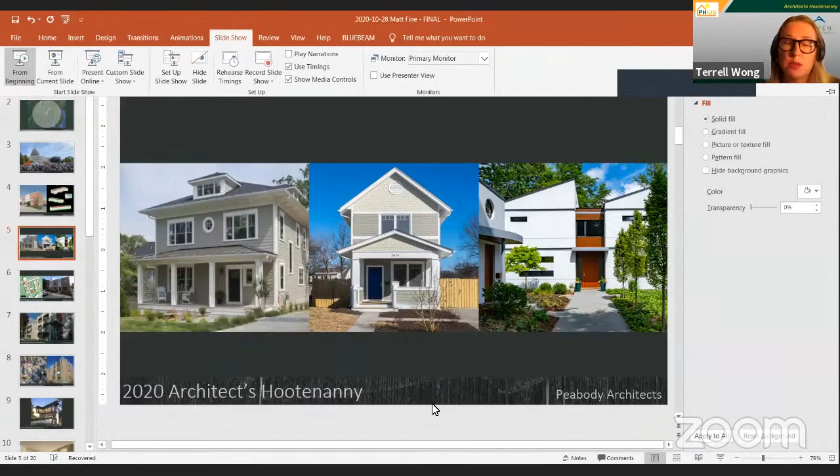So Matt has been following the passive house path actively for 13 years, focusing on multifamily residential and high performance homes. He works at Peabody Architects in Alexandria, Virginia. And if you Google the address, it's really quite a nice residential neighborhood. The project he feels most mixed emotions for, with its large challenges and innovations, was the retrofit of a 1967 masonry multi-unit residential building, the Weinberg Commons. When not toiling away thinking about supreme interior comfort with the integration of mechanicals and the envelope, you might find him at home riding a bike.

Under the category of damn, wish I had designed that, the symmetry and simplicity of Louis Kahn's Exeter Library was first on his list. His thoughts on 2020 and the pandemic: Matt is just so grateful to be able to continue safely at home while others are suiting up and on the front line. So let's give a warm welcome to Matt Fine and his talk on passive house architecture. Thank you.

Thank you, Terrell. Okay, the Pecha Kucha format is going to be a sprint for me, so I'm going to do my best here.

I come to high performance and passive house design through a lens of preservation. My youth was spent in the outdoors, a good portion of that. And I took away an appreciation for our resources, and I really wanted to, in my career, even though I would be making things, I wanted to preserve as much as possible.

The region is in the mixed humid climate of the mid-Atlantic. We practice in 125 miles of radius, but most of our projects are within the beltway of Washington, D.C. It's an area of polarities. It's an area of wealth and poverty, of unaffordability, and of a tough climate to work within with a mixed humid climate. Unfortunately, things change too slow around here. And so we're trying to make that scale jump and that velocity happen a little better.

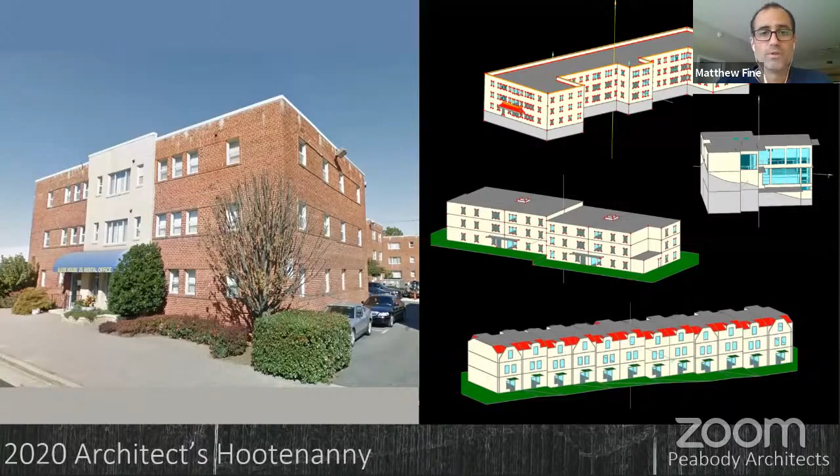We have a legacy of mid-century masonry buildings in the region that are inefficient to begin with, and pretty dense development. So the lots are scarce and usually difficult. We also have high-end construction, infill generally, but budgets are still difficult. So we still have to optimize the high-performance designs for these lots.

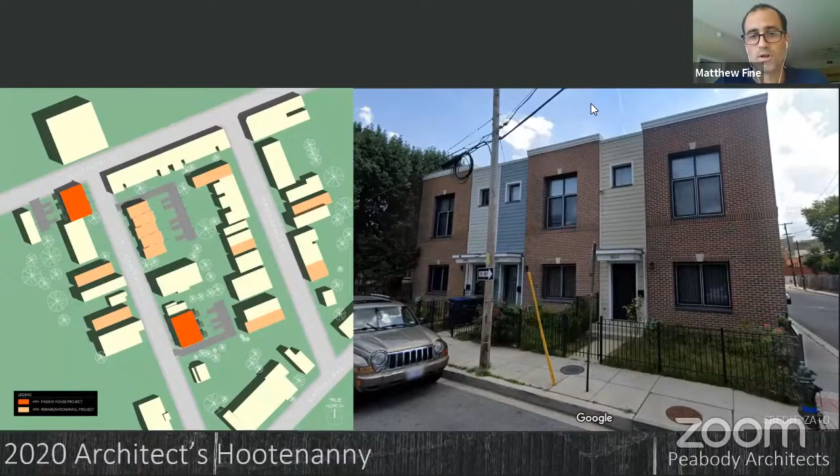In 2008, when the economic recession happened, I was fortunate to be in affordable housing at the time, and there was steady jobs still in this region. The pipeline for affordable work is slow. I began with DC Habitat for Humanity's Ivy City project, and the project that Terrell mentioned is the Weinberg Commons project, which was a masonry retrofit of '60s-era affordable buildings, 36 units in all.

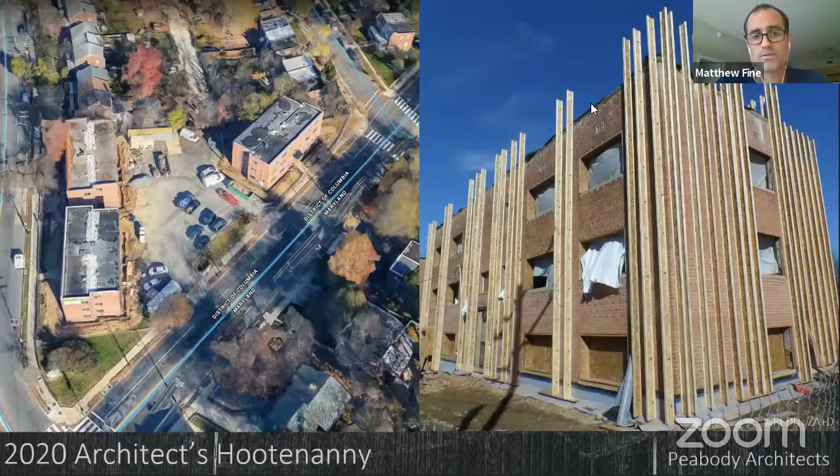And we really saw this as a scale jump from doing one-off single-family passive houses, and really kind of a demonstration project that we could show that we could use these old buildings, not disrupt community, not disrupt neighborhoods, but still deliver high performance. On the other end of the spectrum, in Peabody Architects, we're still working on high-end residential.

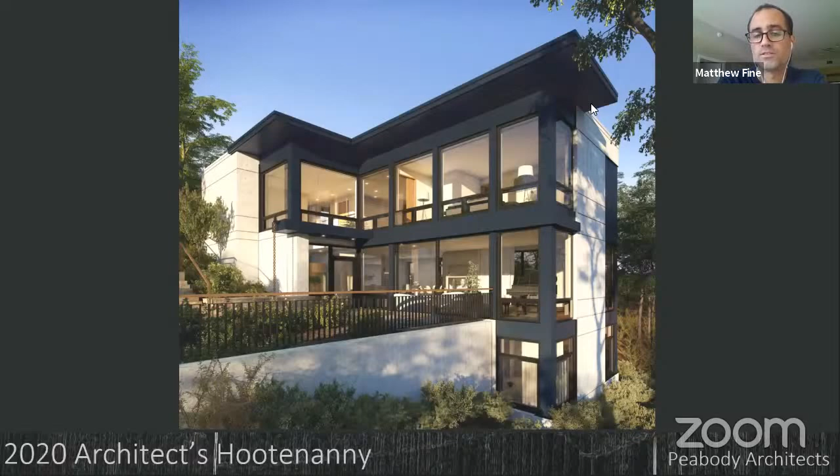And so this was kind of a playground, if you will, for us to take the lessons learned of those difficult projects and say, how can we refine this? How can we optimize interior comfort? How can we make a more delightful space? How can we bring the outdoors indoors more so, where we can control solar gains and really deliver as much supreme comfort as possible.

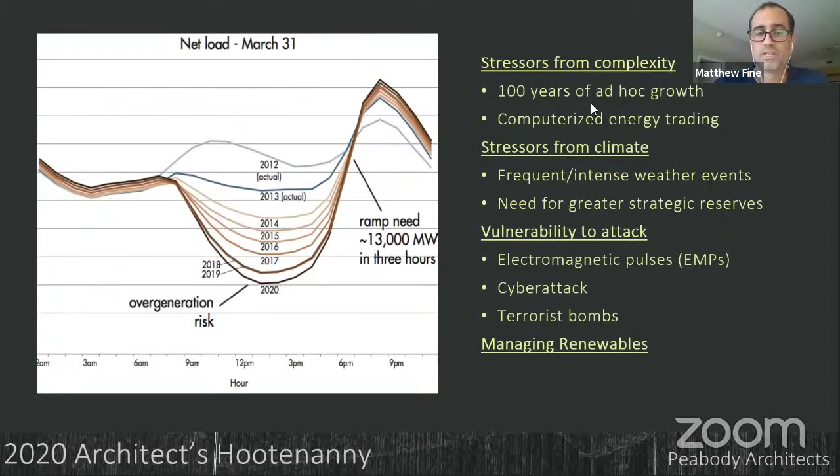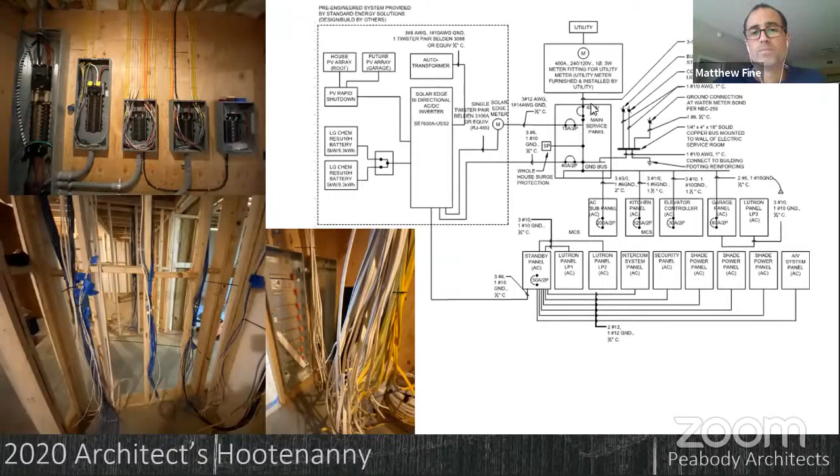This project in North Arlington is basically a future-ready house, and so the client was driven to collect solar energy and store it, because she wanted to be basically islandable, or be ready when the electric grid is ready to support our buildings. So the big takeaways from this is lots and lots of wire and special inverters, basically a bidirectional AC-DC inverter, which lets you collect and keep your DC electric locally and use that and not be grid tied.

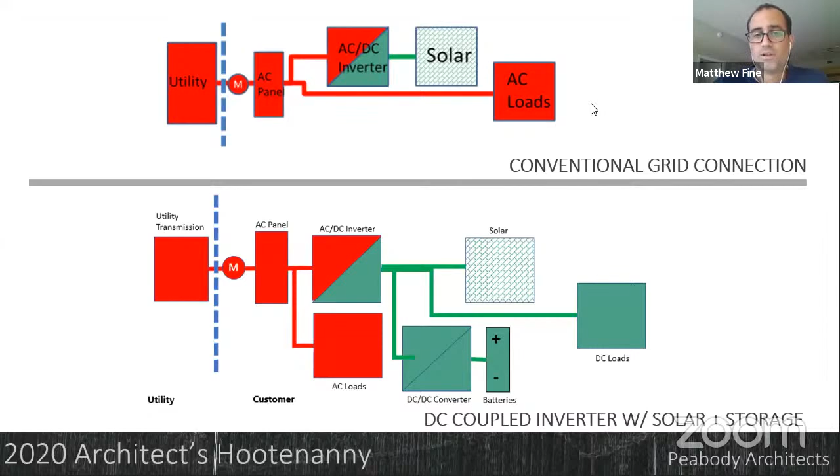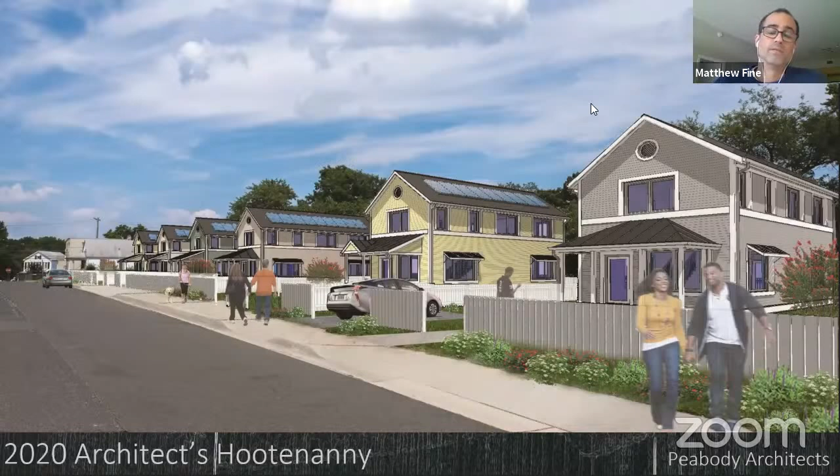The infrastructure is not ready for it. So this house, as I said, is future ready, is able to do that, but it's not able to feed, say, DC current to neighbors or to the neighborhood. Stepping back a bit, in the classification of cost, we really want to pay attention to that affordability problem that we have.

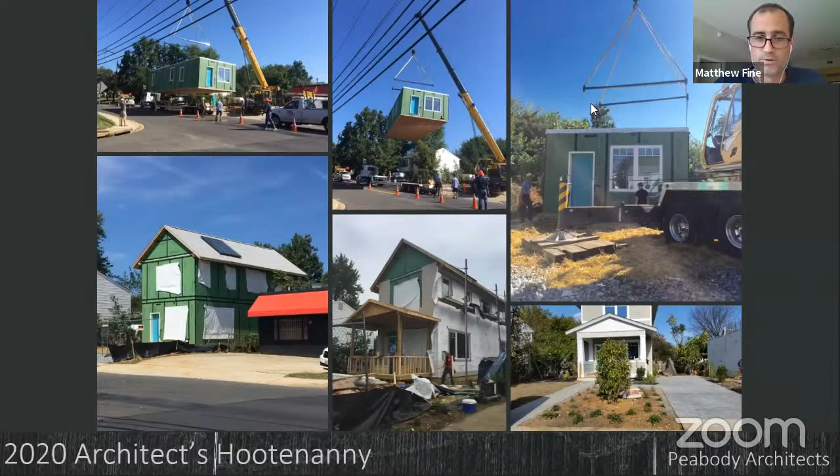Passive house, as we know, is not always equal to code construction cost-wise. So we really need to dial down the complexity of these buildings as far as envelopes. We need to standardize them. So modular construction is really a great way to do it affordably, we found. And, you know, economies of scale. So multiplication of the same design.

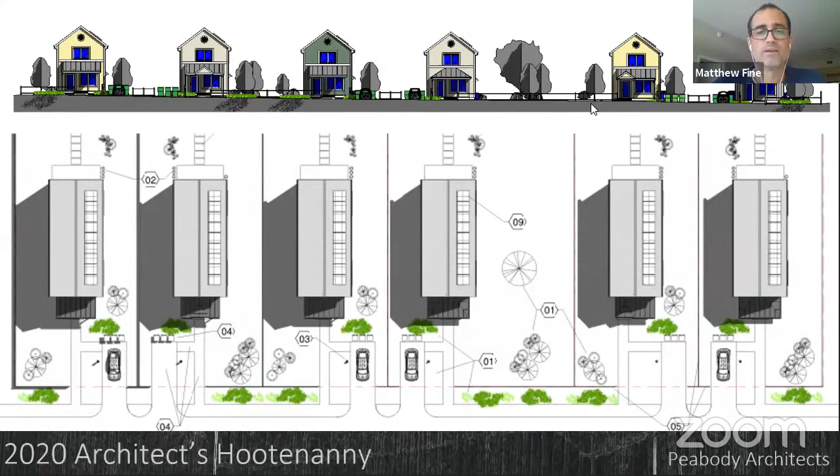Now, this is a project we have in Prince George's County in Maryland that is 6 affordable houses, 3-bedroom houses, which will be future ready by the use of a DC microgrid. In concept, it's the same as the single family DC ready house. It's to have inverters local, to collect and to be able to store local.

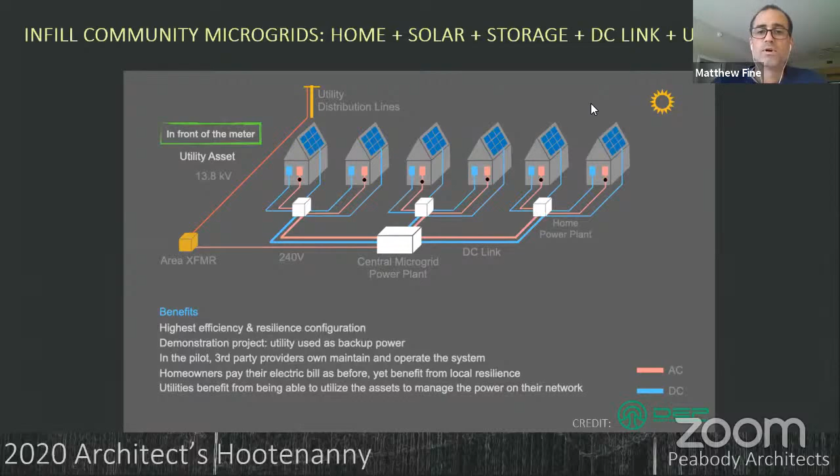So in concept, as I said, the grid, the infrastructure is not ready, but we can be as ready as possible for it. So it's basically just moving those inverters out of the houses and into the neighborhood, have these home power plants that share between a central power plant and the individual houses.

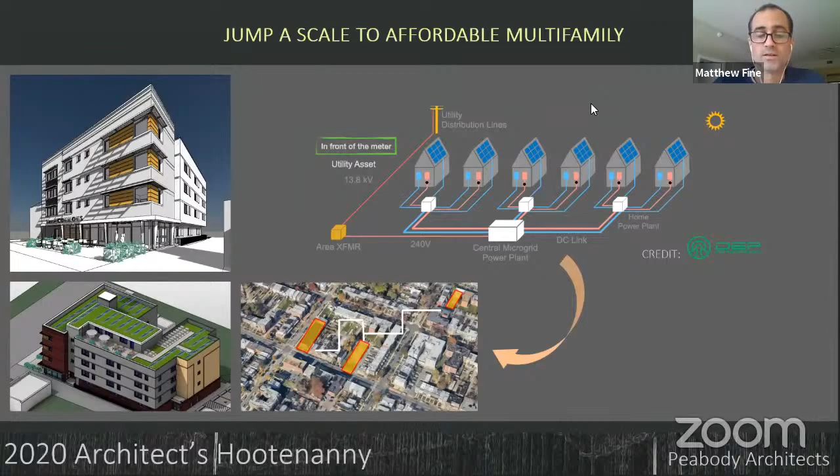Now, to look to the future, 6 houses is still a drop in the bucket. So we really need to pay attention to, again, jumping the scale and looking at more dense development, larger buildings, and really using the same technology. I return back to my roots and my values about this. I really think that we need to pay attention as architects to affordability and to equity. And I think the technology is there. I think as long as we're taking the helm as architects in these projects, we have hope.

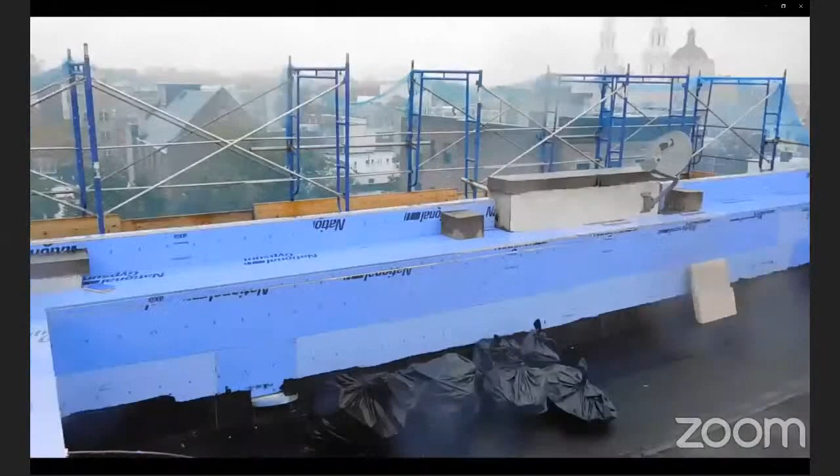Hello, Passive House friends. I'm here at 116 Grove Street in Brooklyn, and I'm going to show you the Casa Passiva project. This is a project to make existing buildings Passive House compliant with tenants in place. So we're up on the roof, and these are 4 buildings that happen to be in a row, and they're part of a 9 building project. And a lot of the work is happening up on the roof, and we're calling it our home base.

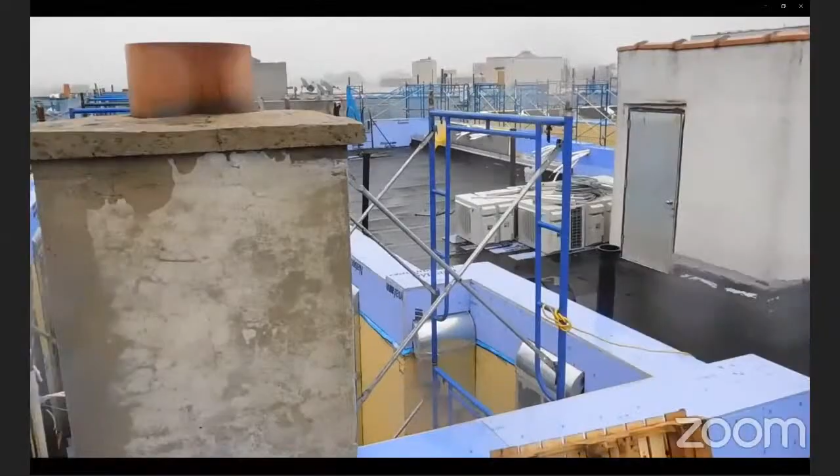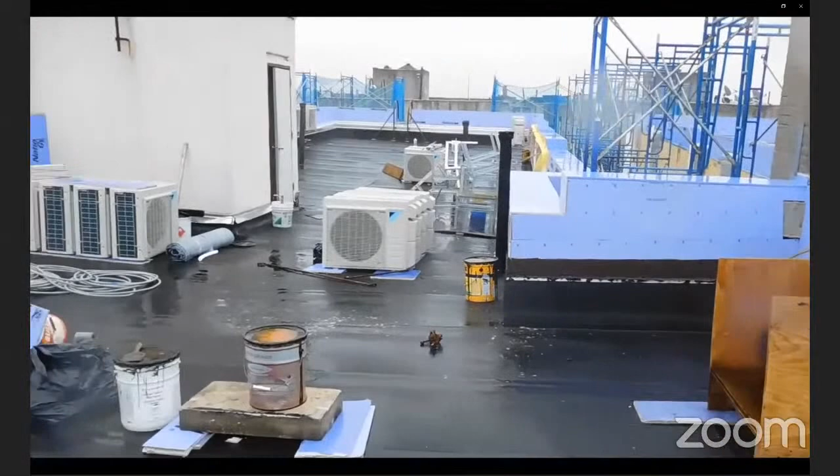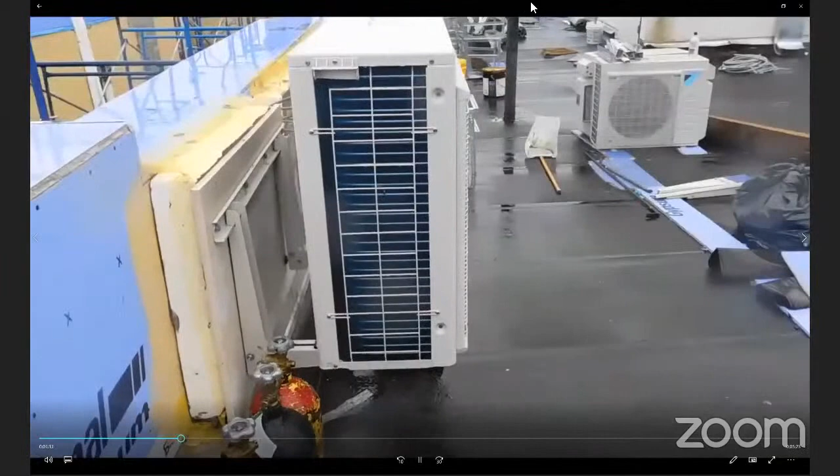So lots of details here, and we're going to walk through the roof and look at a bunch of the things that are going on here and talk about how they all come together. This view captures the basics of what we're doing here. We're mounting ductless split condenser units on the parapet walls. Here you can see a detail of that connection.

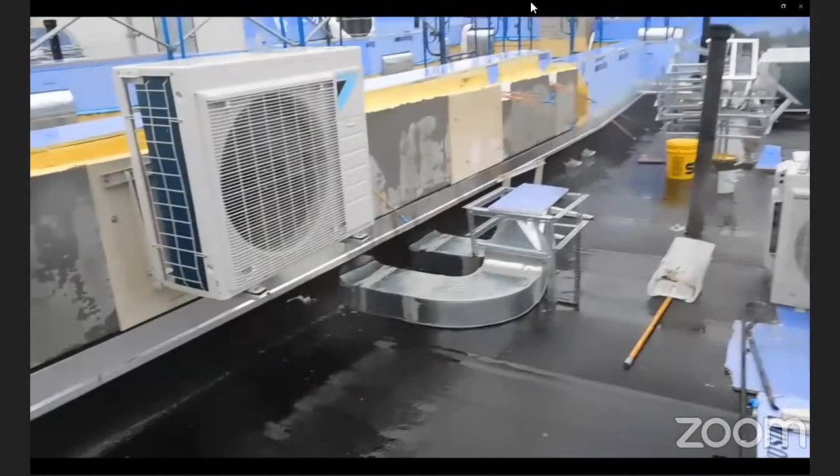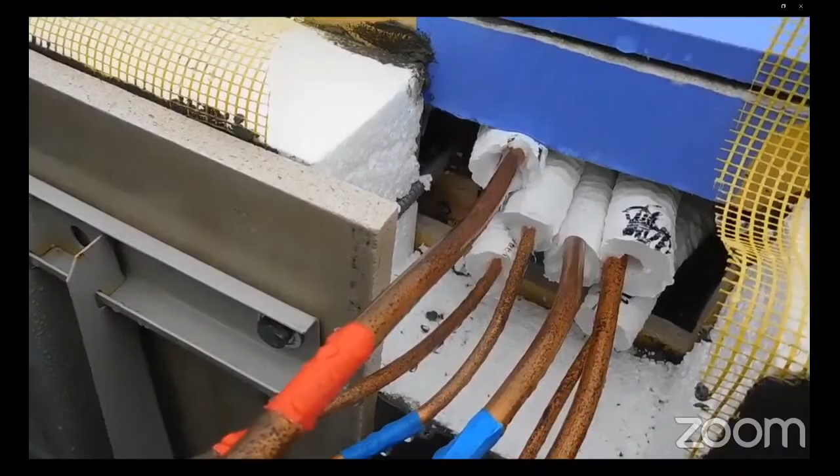Walking past the ductless split condensers, we come to a place where we will be mounting an energy recovery ventilator on top of this stand. And you can see the ductwork that is leading into it, and then insulated on the other side. The connection of the refrigerant lines from the outdoor unit to the indoor heads has a very strict protocol attached to it that we inspect.

And the first thing is brazing the refrigerant lines while running nitrogen through the refrigerant line. The second test for the refrigerant lines is to perform a pressurization test that will hold for 24 hours. And then after that test is passed, there's a triple evacuation to get moisture out of the lines.

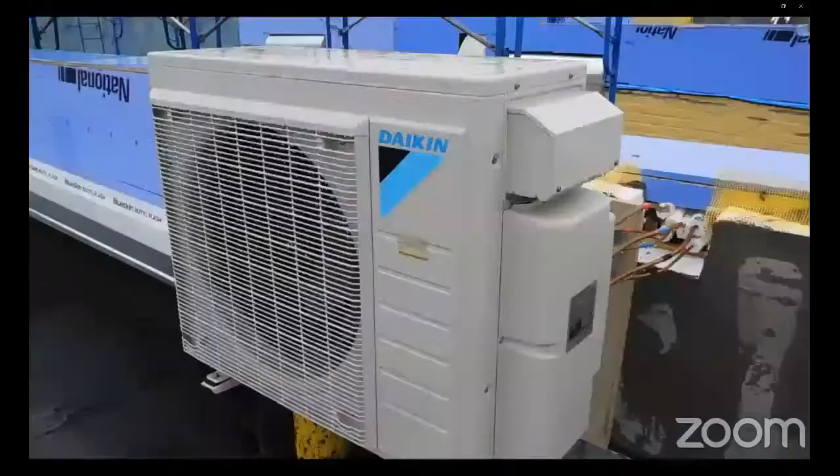And then finally, the amount of refrigerant is calculated, and if there is not enough refrigerant in the charge that came with the unit, there's additional refrigerant added, which is weighed out and monitored. This leaves our ductless split units with their optimal ability to perform.

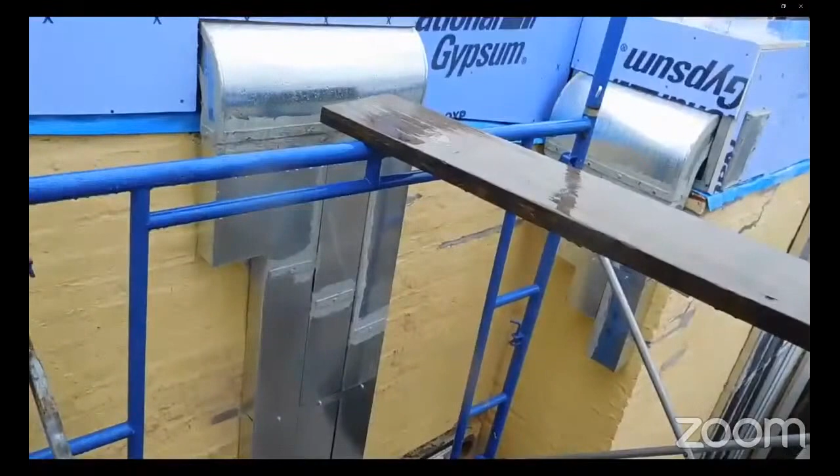In this view, you can see the ducts that have come out of the ERV up on the roof and are now coming through the parapet and waterfalling down the side of the building, with ports stopping at each of the apartments on the way down to provide either supply or return air.

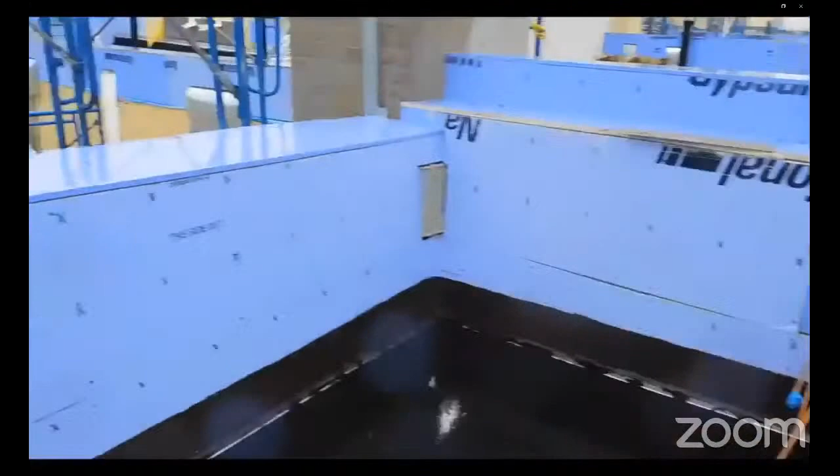Here you can see refrigerant lines that are coming through the parapets, and these lines are going to connect to the back side of the condensers, or the side of the condenser. And over here we see refrigerant lines going down that will connect to the interior.

Even though our parapet walls look a little crude, they get some special details, like this piece of metal flashing. This piece of metal flashing will be the end point for the EIFS that's coming over the top of the parapet wall. So this piece of flashing terminates the EIFS above, but at the same time allows for the roofing coming up to be removed sometime in the future when it needs to be replaced. A piece of foam will be installed behind this metal flashing with a metal apron holding it in place.

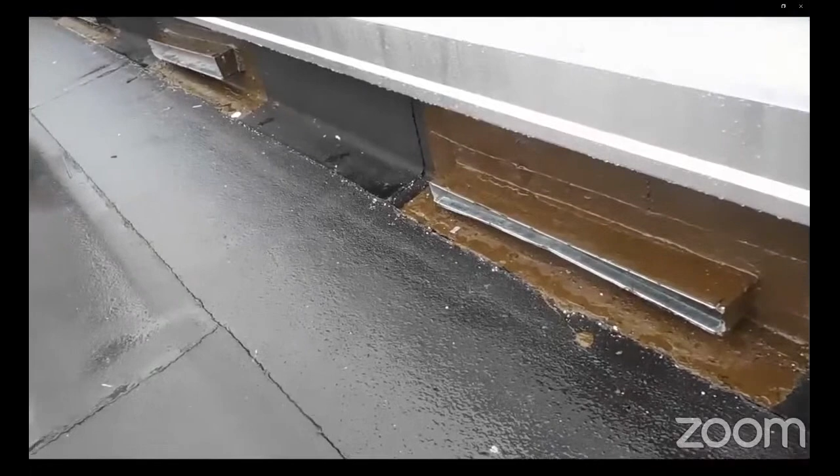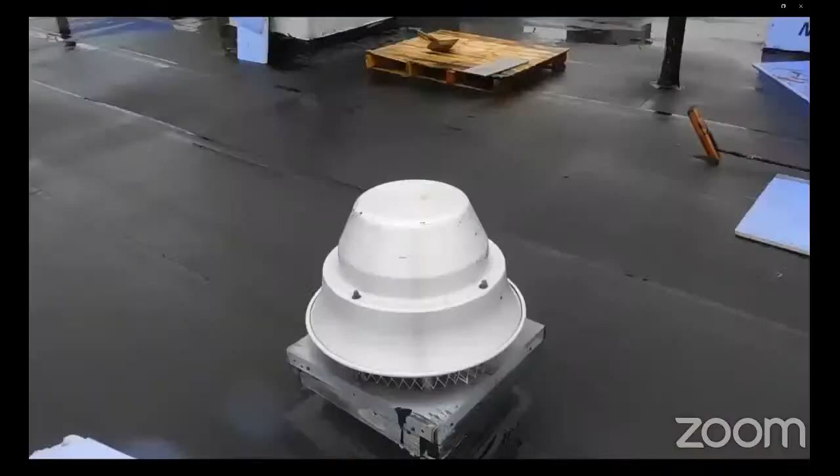Finally, all of the ducts that are leaving the roof from the ERVs are getting sealed into the roofing, and any ducts that come out on the roof side will get sealed into the roofing as well. So all the ducts are in the waterproofing. In places where we have an existing roof fan that already is there, we will use its ductwork, remove this fan, but place an ERV in this roof fan's position, clean the ducts, and seal them with AeroSeal.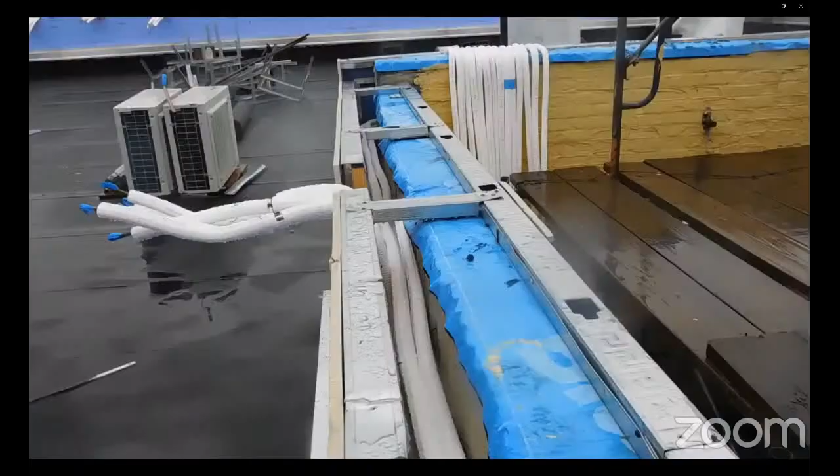Thank you, Chris. That was a very nice video. Now I get to introduce myself, which is very strange. So I started Stone's Throw Design because my passions in architecture, landscape, and ecology really didn't fit into the established firms in Toronto over 21 years ago.

Oh, I should share my screen now. I'm telling everybody else what to do, and I have forgotten what I'm supposed to do. Here we go. Sorry about that. And then from the beginning. Okay.

I've been running headfirst from one really cool project to another, not once wondering too hard about the consequences of my actions. Luckily, I've been blessed with clients almost as out there as I am, willing to try anything once. When I'm not sitting in my head saving the world, I hop on my electric Zero motorcycle and ride through the Ontario back roads. In the damn, I wish I designed that category.

There are too many to mention, but I will bring your attention to a small project at Bedford Glen Housing Project built around a ravine in Midtown Toronto. It has aged beautifully since its construction sometime in the mid to late 70s. Sadly, I've forgotten the architect's name.

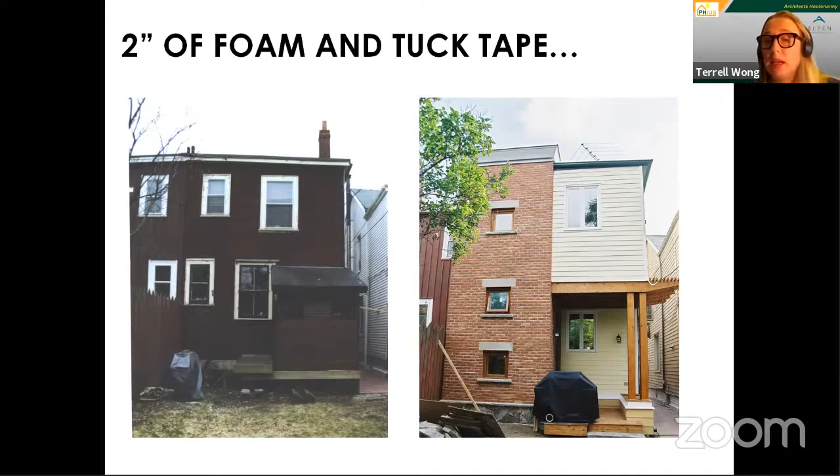At the beginning, I read everything I could get my hands on about construction, R2000, Joe Lstiburek, and the perfect wall. This is my first home, 5 different renovations, 5 types of insulation, many, many building experiments. Oh, I forgot the slide was still in there. Sorry, let's skip ahead. My first straw bale home.

A former classmate asked me to prepare working drawings for a cottage that she had designed. This was the first straw bale house in Muskoka. The township blew a gasket over the straw bale. They only agreed if Martin Liefhebber, a licensed architect with straw bale experience, signed off on the drawings. Luckily he did. Lots of lessons were learned.

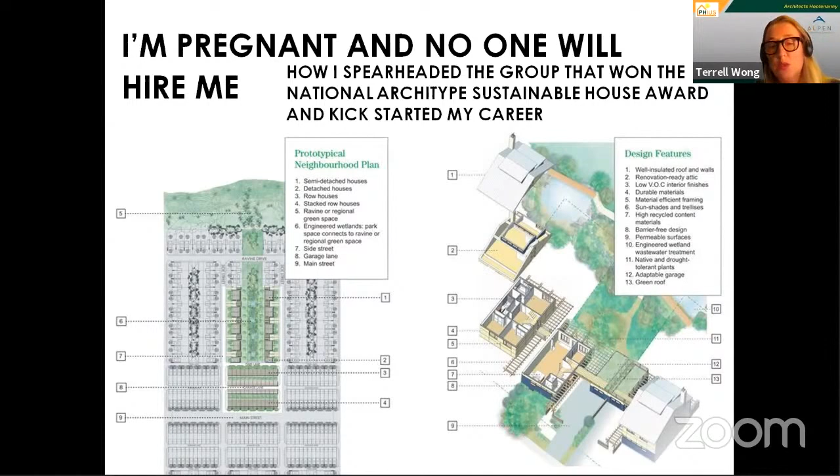This here is called building blocks. It was a prefab home with 10 out of 26 modules that you could choose to allow for a 2-bedroom to a 7-bedroom home. It could be combined to make a single family home, a semi-detached, a townhouse, or a stacked townhouse. In the center, if you can see my screen, there's a communal engineered wetland that deals with all the gray and black water on the site.

And then I found Passive House. Equipped with fresh Phius experience, training, and sheer enthusiasm, we gutted this house down to the structural masonry, built up new insulated walls, set them off 2 inches from the exterior for a continuous barrier. Sadly, the air tightness was only 1.5 air changes per hour, but it was my first attempt, and I had to use 80% existing windows. This house uses about 75% less energy than it did before.

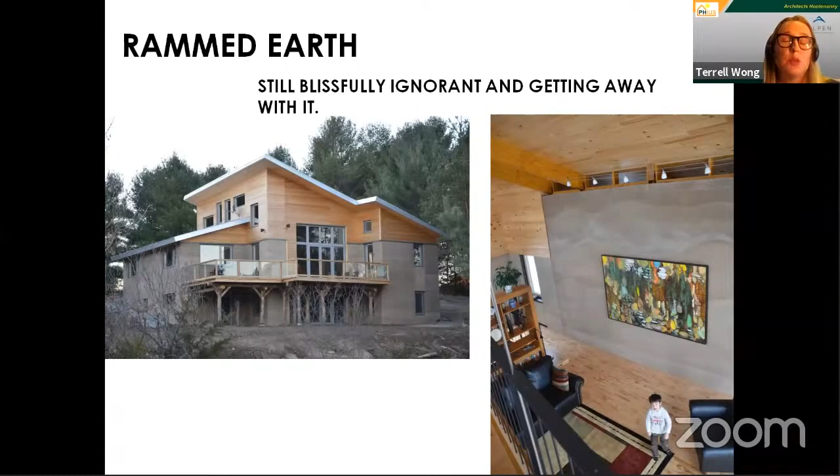And then someone asked me, would you design with dirt? Sure, that's my answer. 6 inches of rammed earth, 6 inches of polyiso insulation, and another 6 inches of rammed earth. The devil is in the details. We have a SIPs panel roof on this one, XPS under the slab, and the total site energy is well under the 120 kilowatt hours per square meter per annum.

Straw bale take 2. Permit is flat out denied without any explanations. So I changed the name of straw bale to cellulose and got a permit. Created a huge alternative compliance package on straw bale and made it public. Resubmitted, got the permit just before the straw arrived.

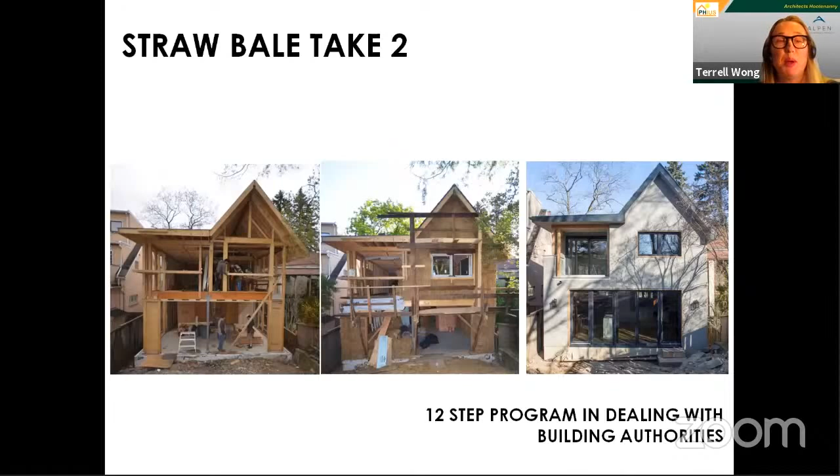Ooh, the picture didn't show up. Ooh, that's too bad.

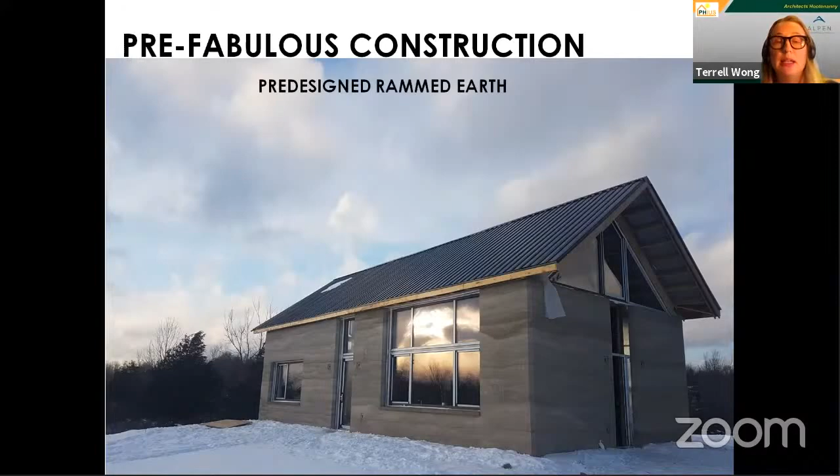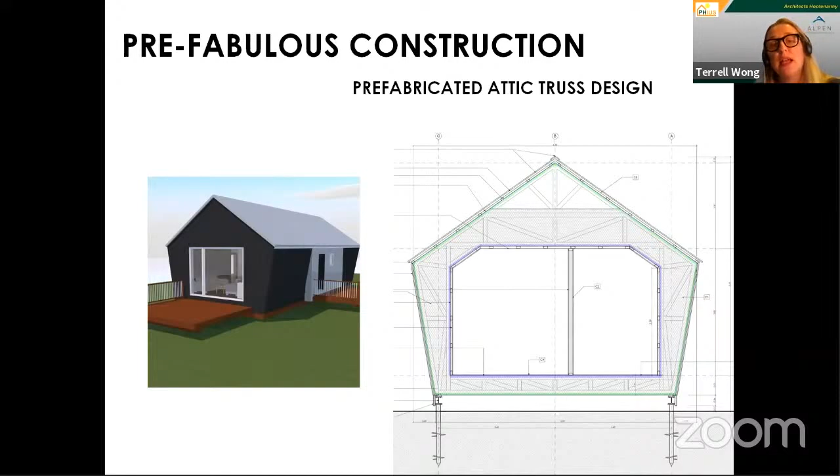There's another prefab design that I do, where we work with Aiken Frame Homes. We take attic trusses, put them on helical piles to create the house. This one is a 1-story home, but many of them are designed so that as the family grows, the attic truss is raised and the first floor is built afterwards. This is done with cellulose insulation and zip panels, sorry.

Oh, hopefully my pictures are going to show up. This is not good. I don't know what's happening. Okay, cross-country checkup. I had a map of Canada on there. I tested these earlier. This is very interesting. So this is where, this is so strange. This is where I was going to talk about Canada. I'm feeling very bad now.

Nova Scotia, I'm going to get a report from Laurie Rand at Habit Studio in Nova Scotia. So it's at the far east side of Canada. Nova Scotia has loads of single family homes, largely due to the work of Passive Design Solutions. Everyone knows Natalie Leonard. Her team is working on over 100 projects locally and in North America. Currently, Laurie Rand herself has 6 passive house projects on the go. And she's also working on a passive house museum in Cape Breton that is about to go to tender.

I have no idea why this is not working.

Okay. Quebec, that's in the middle, somewhere to the east of Ontario. Will Murray of Rocket Construction. There are a couple of Phius projects on the go in the Eastern Townships, and there is interest in certification, but with the very low cost of hydro in that province and the added cost of certification, the projects typically get pulled back to become really great houses, less the PV and the energy credits.

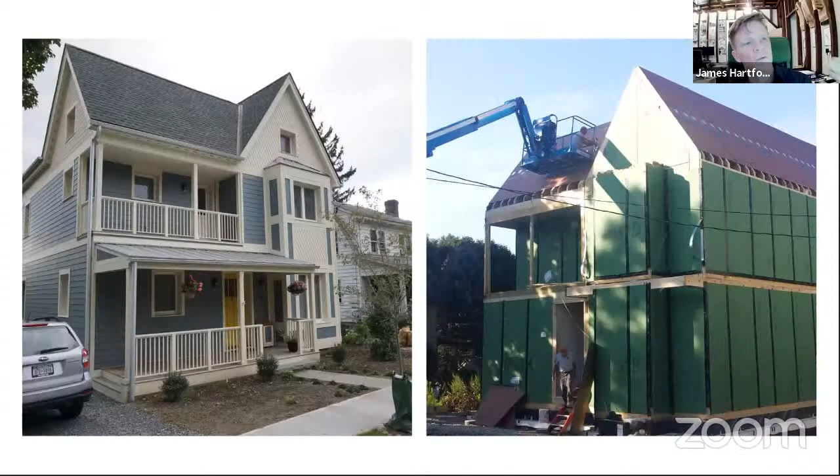So all the views are actually to the west and the north, and we actually only have one small window in the south. But glare is controlled by the mountains actually opposite. We had a loved Victorian house burned down, and we replaced it actually with a modular passive house, trying different ways. We essentially did a retrofit on this once the six boxes were set, and then brought it up.

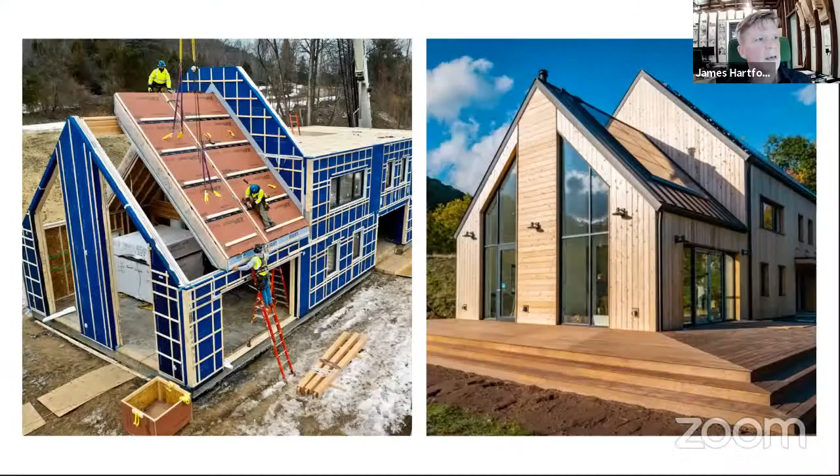So then we got into doing pre-design offerings, and our first client actually supersized our pre-design offerings that were meant to be much smaller. But we got to test the concept. And so this is in the Catskills. We built that with R.L. Baxter, a local passive house firm, and also used Benson Wood for our panels and flat packed it. And a Tesla Powerwall system, so we're fossil fuel free and get to flatten out our energy use throughout the day, and into the night.

Here's a house that's a bit more traditional looking. It's on a mountaintop here in Garrison, and it has views all the way down to New York City. It's got ICFs and Larsen truss construction, and also solar. It's source net zero. The interior is more classic. Back to Terrell's point, we want to make our buildings loved so that people don't change them much. So hopefully they have greater longevity that way. And rich materials, but honest materials that would wear well over time.

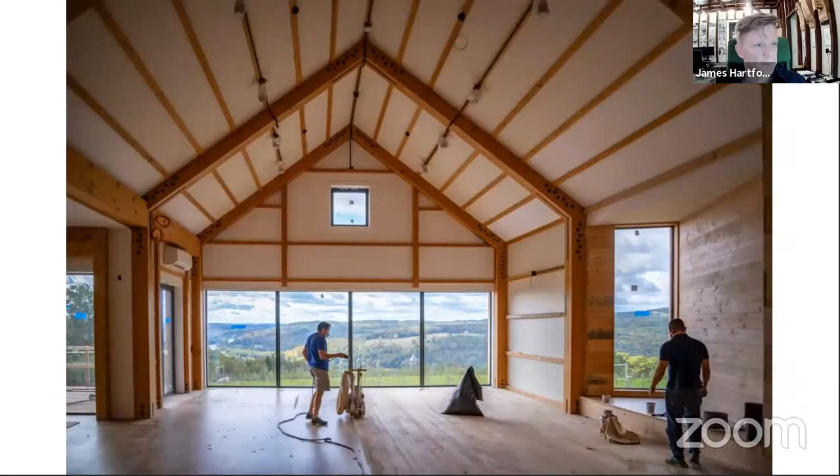We had a parallel business kind of in the works, developing breweries. And so we've done new construction, LEED Gold structures, as well as interior fit-outs of historic buildings. And it's a lot of fun because this is really getting back to bars and restaurants that a lot of architects cut their teeth on. And we got to actually bring both halves of our brain together, doing a passive house cidery and new construction, taking a modern take on the old bank barn approach, which is emblematic of the Catskills. So this project looks out over the Delaware River Valley, and across the orchards. We have one temperate zone downstairs in the production space, and then the event space itself is conditioned for human comfort, with reclaimed larch from a bridge project actually across the Hudson River.

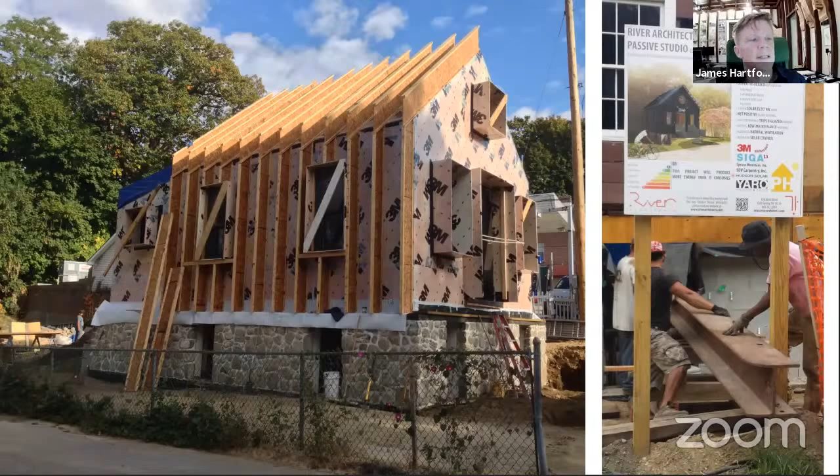And then our own studio, which is a circa 1840s barn, which was for shoeing horses. So we're source net zero, have 10 computers and dual monitors, and it's home to our studio and often to our kids, especially during the pandemic. This retrofit was quite a heavy lift. Literally, we moved the frame off the foundations, rebuilt the foundations, put the frame back on, and did an exterior tightening. You can see the cribbing being pulled out there underneath our project sign. We had extremely tight airtightness, 0.2 air changes per hour. But then we got to expose the interior timber and really enjoy the history from the inside. And it is often our training spot, but also our partying spot. Here we are with a three-generation building crew, the Hootenanny builders.

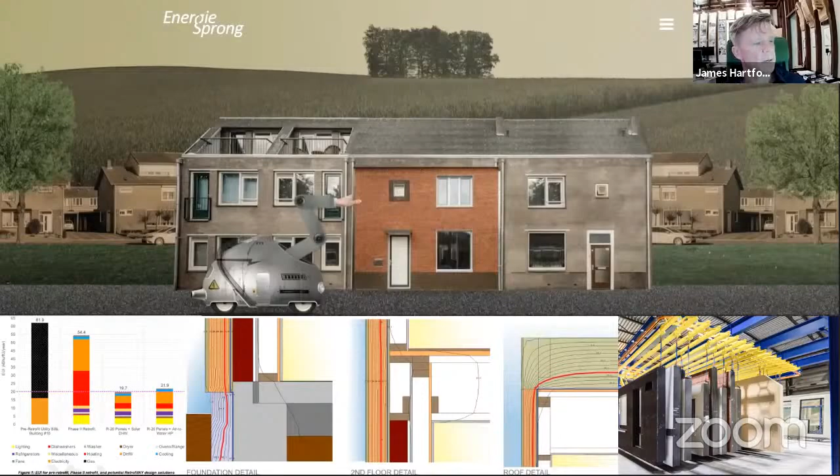Our firm also participated in the Energiesprong Retrofit New York pilot program. And we got to work on the Troy Housing Authority conceptually, bringing the EUI down from 81 in the original buildings to below around 16. And then we also participated in the NYSERDA Buildings of Excellence first program and won $1 million for our clients for this project, a 53 new dwelling unit over commercial space. Obviously very interested in reducing local impact. And I'm the founder of the Passive House Alliance Hudson Valley, which is the largest passive chapter in the Northeast. Very busy in advocacy and working very closely with NYSERDA, bringing Phius training to the Hudson Valley and connecting professionals. And that's my time. Thanks.

All right, had to unmute myself there. Okay, thank you very much, James. That was great. At least your slide showed. I'm feeling very bad. All right, so we're going to move on to Catherine Baker of Landon Bone Baker Architects. Catherine, can you show your screen now so nobody has to look at me?

Catherine is of many minds, with a master's in social science, a degree in architecture, and she's a passive house expert. She has combined her passions into creating livable, low-energy, multi-unit residential buildings. She's passionate about how different cultures and different individuals affect the buildings they live in, how the users personalize construction over time. Her favorite project is the Dorchester Art and Housing Collaborative Project. They took an abandoned building and turned it into artist housing with a community art space. Programming is available constantly for the immediate neighborhood, and the building has become well loved by the community. In the category she wishes she had designed, Notre Dame du Haut chapel by Le Corbusier at Ronchamp is her favorite.

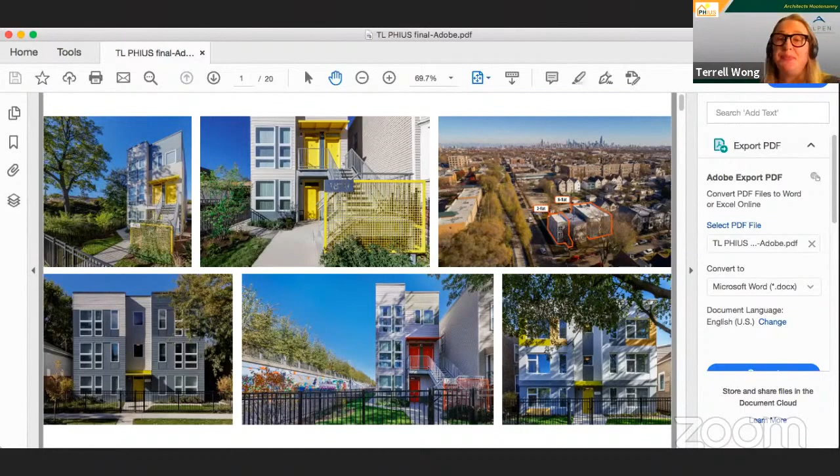Thank you, Terrell. I'll talk a little bit about Tierra Linda. So Tierra Linda is an affordable housing project that contains the first multifamily passive house residence constructed in Chicago, Illinois. And that's kind of important because Chicago has an issue with fire, so our building code's a little bit complicated.

It was developed by the Community Development Corporation, LUCHA, also known as Latin United Community Housing Association. So I am Catherine Baker, and I'm an architect who works at Landon Bone Baker Architects. We design affordable housing, mainly in Chicago, and I'm going to tell you a little bit, about 6.5 minutes worth, about passive house at Tierra Linda and why we believe it's important. Some background on the project.

Tierra Linda was originally conceived of as an affordable housing project, providing 45 affordable family apartments in the Humboldt Park and Logan Square neighborhoods in Chicago. Affordable housing is critical in these neighborhoods. In Humboldt Park, approximately 65% of the rental population is cost burdened, meaning 65% of residents pay over 30% of their income on rent. The Logan Square neighborhood has also been identified as having a lack of parks and green space. In fact, it had the least amount of green space per capita in the city of Chicago.

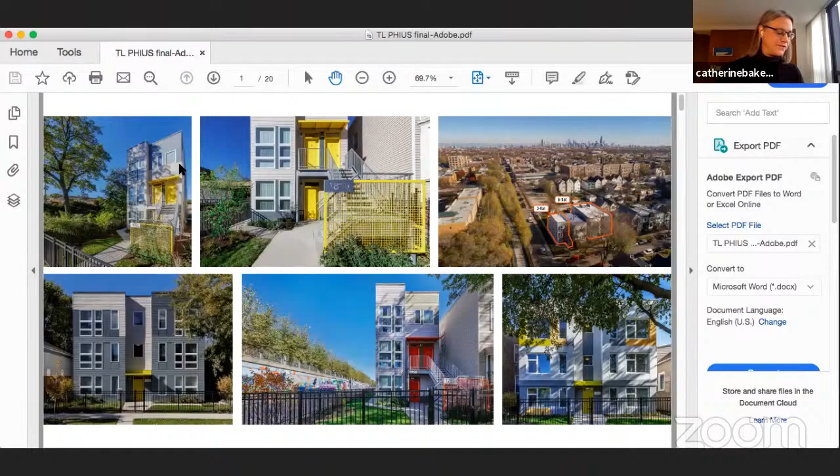In 2015, a plan by the city to transform an abandoned elevated rail line called the 606 into a 2.7 mile pedestrian trail was realized. The new trail brought much needed...

Yep. Your slides are not advancing. Oh, okay, sorry. Let's see. Do you know where I left off? It was the big screen from the beginning, the same one. Oh dear, okay. Just start over, do it again. All right, let's see, maybe it'll load. Okay.

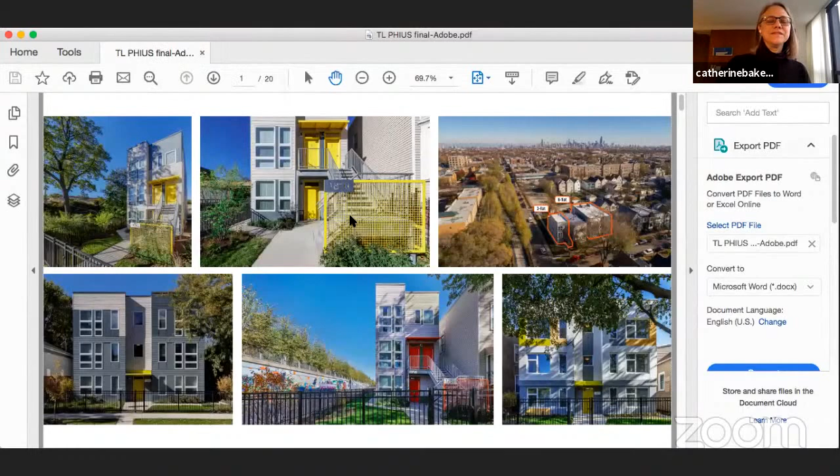Okay, so Tierra Linda is an affordable housing project that contains the first multifamily passive house residence constructed in Chicago, Illinois. It was developed by the Community Development Corporation, LUCHA, Latin United Community Housing Association, in 2018.

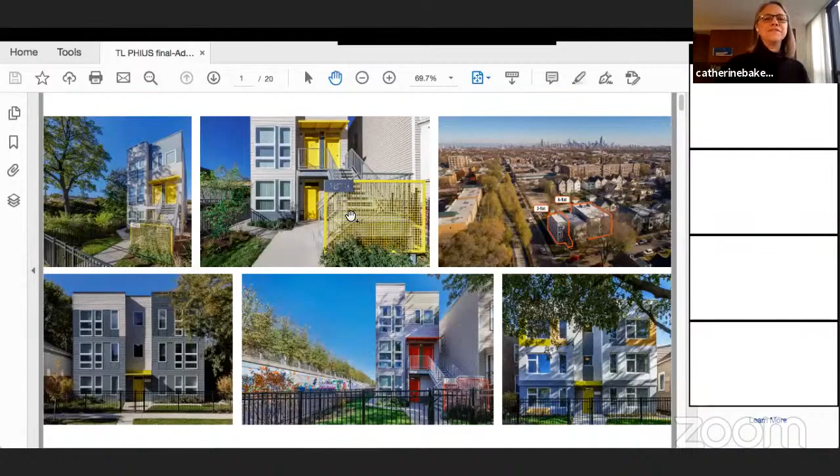So let's see if they advance before I continue on. Are you seeing the slide? It's still the first picture that we saw initially. Okay. I'll just have to advance. Okay, sorry, we're just going to do it low key here.

Fine. So my name is Catherine Baker, and I'm an architect who works at Landon Bone Baker Architects. We design affordable housing, mainly in Chicago, and I'm going to tell you a little bit about the project, about 6.5 minutes worth, maybe a little bit more now, about Passive House at Tierra Linda and why we believe it's important. Some background on the project.

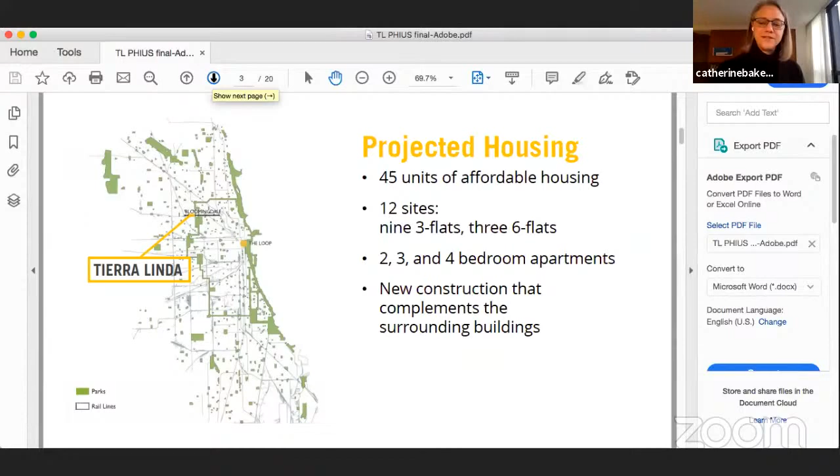Tierra Linda was originally conceived of as an affordable housing project, providing 45 affordable family apartments in the Humboldt Park and Logan Square neighborhoods in Chicago. Affordable housing is critical in these neighborhoods. In Humboldt Park, approximately 65% of the rental population is cost burdened, meaning 65% of residents pay over 30% of their income on rent. Logan Square neighborhood has also been identified as having a lack of parks and green space. In fact, it had the least amount of green space per capita in the city of Chicago.

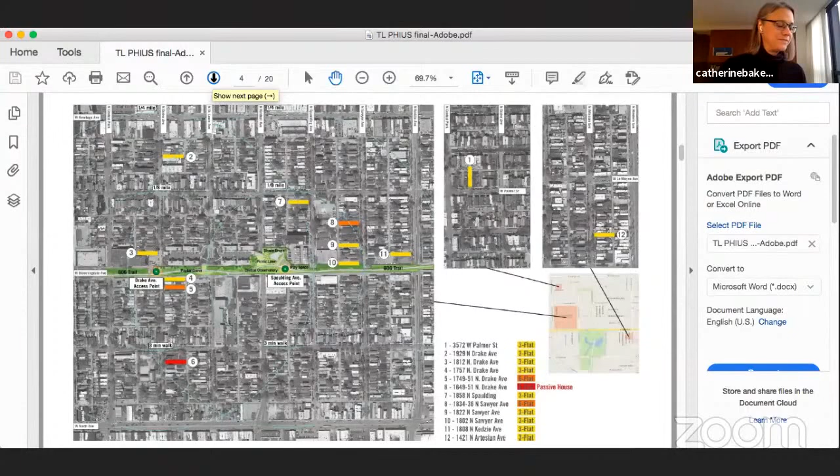In 2015, a plan by the city to transform an abandoned elevated rail line called the 606 into a 2.7 mile pedestrian trail was realized. The new trail brought much needed green space to the neighborhood, but it also spurred real estate speculation and gentrification, which threatens affordable housing. A lack of decent affordable housing compounded with a lack of green spaces in these neighborhoods have been prime contributing factors to health issues such as asthma, diabetes, and obesity. Many residents forego medical care, surgery, treatment, prescriptions, and even eyeglasses due to cost.

As the project was forming, LUCHA understood that providing affordable housing wasn't going to be enough. The housing needed to address overall quality of life issues for the residents. And to be successful, it needed to address these issues through a collaborative process driven by community needs and input. LUCHA believed that the residents deserved the most sustainable housing possible and wanted to pursue passive house design.

Being the first multifamily passive house project was important, but just as important was the process taken to achieve this milestone and the implications of this development on future affordable housing projects. LBBA and LUCHA developed and hosted workshops, neighborhood tours, and eco-charrettes with building management, tenants, neighbors, and maintenance staff.

Based on the input from the workshops, the strategies and vision for the project were formed, reinforcing and supporting the core theme of healthy living and wellness. The engagement process also resulted in the design of vibrant buildings that serve as a visual reminder that Latinx families are part of the history and the future of the Chicago neighborhood. Residents helped to select the finishes and colors of the buildings.

As a way to further address healthy living initiatives, Lucha asked LBBA to engage its LBBA Labs program to research and promote bike use with its residents. During a 6-week paid high school internship program, Chicago high school students interviewed Lucha residents about their bike use. They researched the neighborhood, visited bike shops, toured buildings with bike-centered design, and ultimately created an overall plan for integrating bike use into the Lucha buildings.

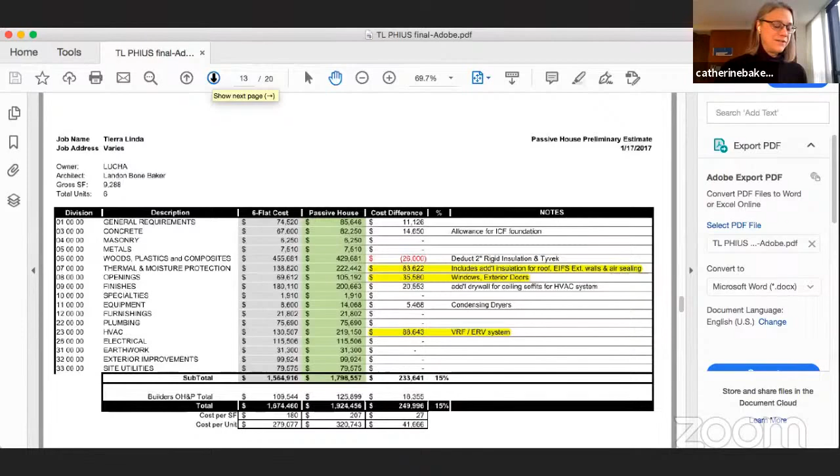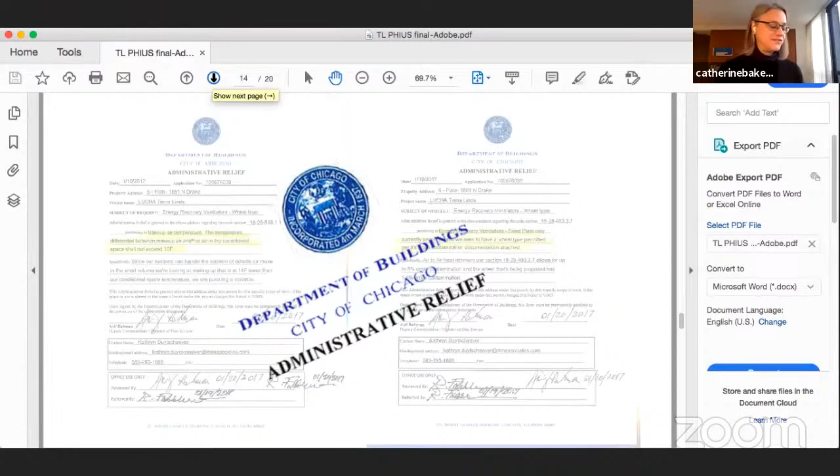Our team and Linn-Mathes, the contractor, researched various wall configurations to meet building codes, energy modeling requirements, construction sequencing, and all with respect to cost issues. Building a multifamily passive house also required code modifications. The team needed to seek administrative relief for non-conforming building code items, such as the wheel-type ERV, and approval for reduced mechanical ventilation. The project received its first residents in the fall of 2018.

One of the very first residents, in fact, had been displaced earlier by Hurricane Maria in Puerto Rico, and she was now experiencing the brutal polar vortex of early 2019. But this time around, her housing was designed to address climate extremes. So what are we doing now? What have we learned? We are currently gathering data.

In addition to the Passive House 6-flat, the development also includes a sister building designed to comply with code minimum Energy Star requirements. These two buildings will allow our partner, Slipstream, to compare energy usage between the two. Slipstream will be analyzing energy performance, construction operating cost, and indoor air quality. In August, Slipstream provided us with some preliminary data. Some key interim takeaways included expected results.

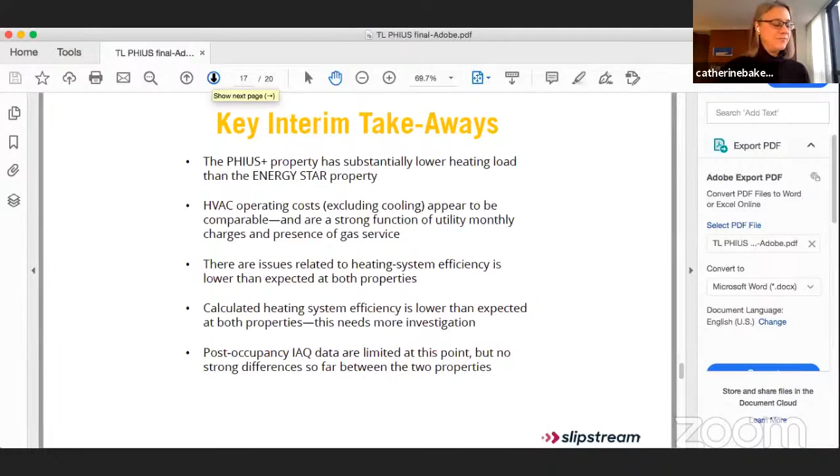The Phius property's air leakage is about 1/3 of the Energy Star property, and the seasonal heating requirement for the Phius property was half of the Energy Star property. But we also learned that data vary greatly between the individual units based on occupancy and behavior. Slipstream's yearly report is coming out soon. Stay tuned. The final report comes out on November 7th. We expect to have more data on cooling loads and a cost analysis. And then there are additional issues that have yet to be identified and will be explored further.

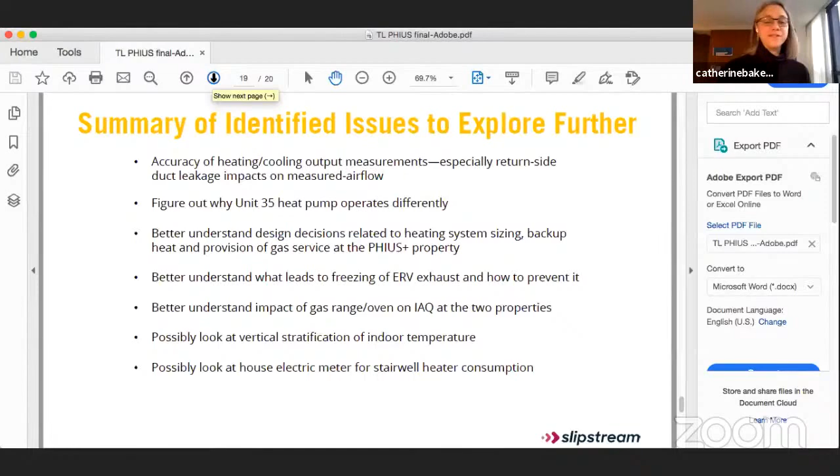So we hope that the success of Tierra Linda opens the door for other affordable housing and also for-profit developers to incorporate passive house standards. We look forward to sharing our lessons with others to promote sustainable and healthy living environments.

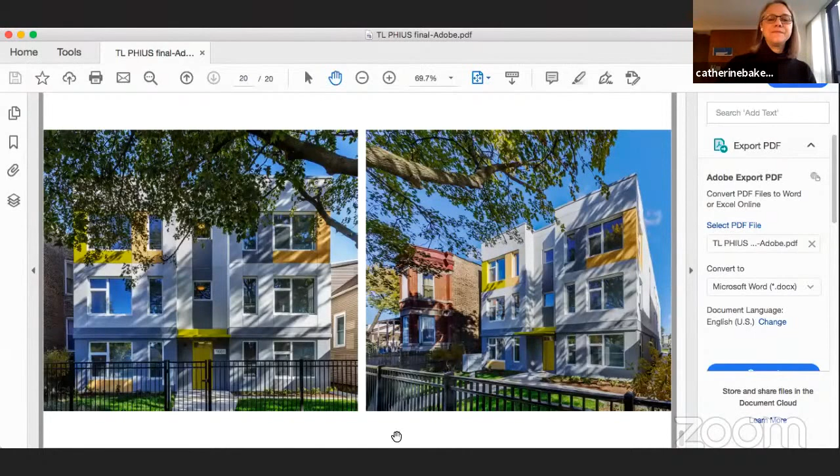Andrew has been putting his architect brain to work ensuring university students get firsthand experience living in passive house comfort. He is proud of the 2 Phius certified dormitories at Williams and Wheaton College. He worked both on the design and on the site construction admin. Andrew's passions turned him on to passive house, taking the training on his own initiative. Keeping up with the passive house community at conferences and in local chapters is important to him.

Finally, someone else to talk to. Currently, he is reading Being Ecological by Timothy Morton, any book that mixes references to Blade Runner, Tibetan Buddhism, and the lyrics of the Talking Heads. I might have to get that. This might also explain Andrew's choice for "damn, I wish I designed that": the Foundling Hospital in Florence by Brunelleschi. This is a man of very diverse thinking. When he is not working, his focus is on his 2 young children. I am certain they will get fantastic answers to the question of why.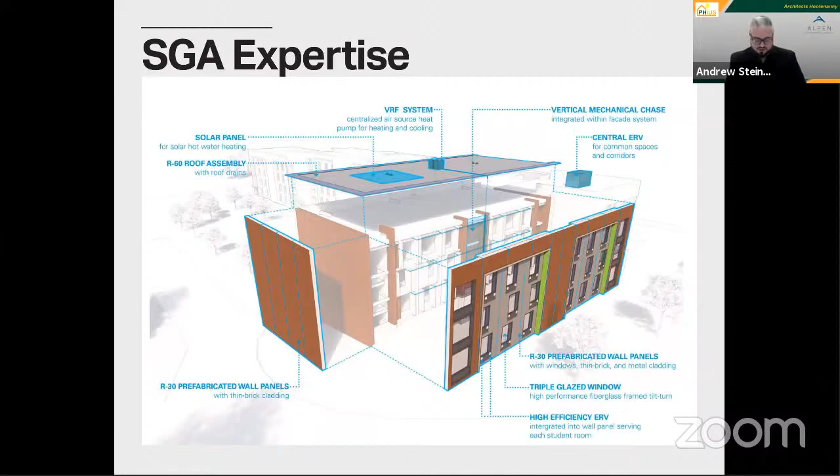As I was saying, our passive building activity has really been championed by our higher ed group here at SGA. And residential halls are a good fit for passive house. Academic institutions see the benefit of the long-term payback through the energy savings and cost savings. And increasingly, students expect to live in sustainable environments.

My personal journey began out of school with working on large commercial buildings, core and shell, multifamily, and renovations on existing buildings like this one. There was a high level of design involved, but the projects weren't particularly energy focused and often involved a lot of glass, although very nicely designed glass. Through these projects, I gained exposure to construction types used in large commercial buildings.

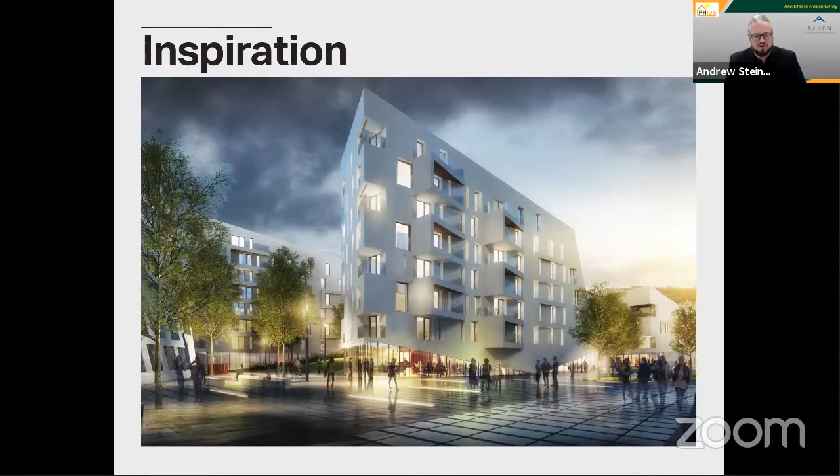Around that time, I started seeing these images on ArchDaily and other places of these really interesting buildings in Europe that were well designed and also didn't use much energy. And I started to say, wow, buildings can do that. And additionally, I became aware of more local examples in our Boston design community of some really great work happening.

My personal journey continued with these Habitat for Humanity projects. They were the first projects of my own which allowed me to experiment. These were the most efficient buildings that this chapter had built to date. They're using HERS scores. I think they're down in the low 30s. In 2013, I took the Phius training and recognized that we have the roadmap to high performance buildings. The second one on the right actually had all the components of a passive house. Zehnder was kind enough to donate ERVs for the project, slightly less R value per Habitat standards.

My evolution continued as a practicing architect. I continued to try to be as responsible as possible with my work. This lab office building in Baltimore had a 40% window wall ratio and better detailing informed by my passive house training, including the beginnings of a window surround detail here that provided shading as well. So I continued to try to be as responsible as possible with my work.

And when I joined SGA, we had our res hall at Williams College underway. This is the first passive house building in our office. And I worked on the detailing and in-house passive house consulting. And it shows how a passive house building can take the form of a wood frame vernacular New England residential building.

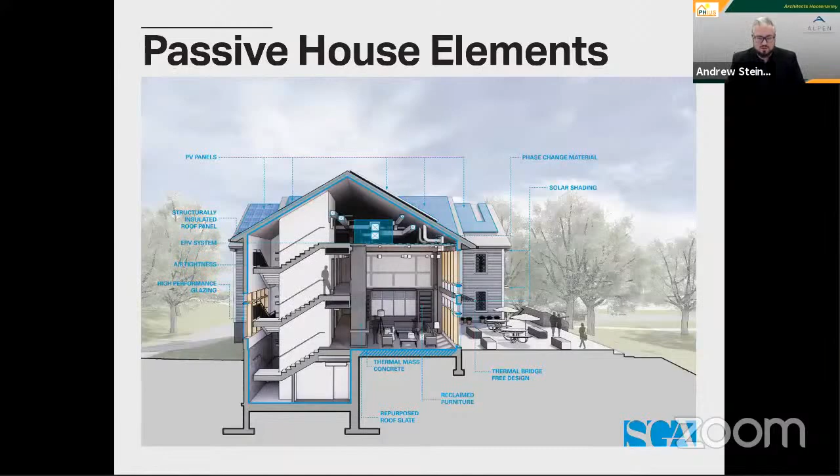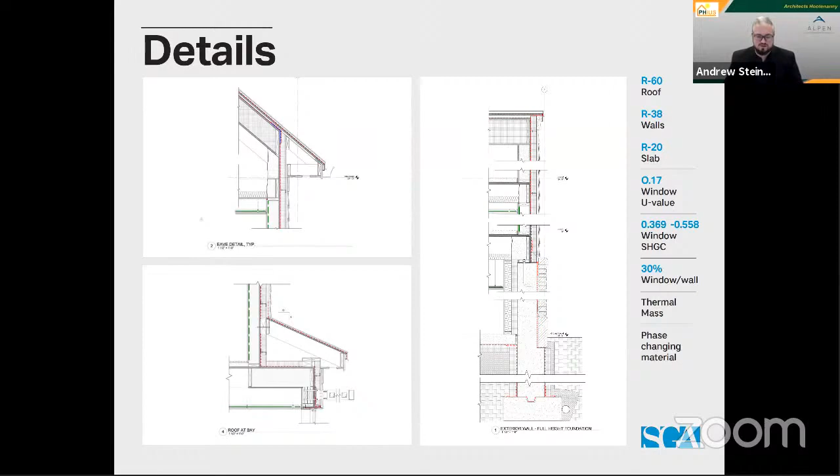So we use a 2x6 stud wall construction with cellulose with 3 inches of polyiso outboard, a cost-effective and simple wall with Hardie siding on battens, and a SIPs roof provided a simple underlayment for a vented metal roof. And this was a little bit unique in the office where we were doing a wood frame building, which typically we don't do, and developing details that were outside of the thermal envelope for all those projections and things like that.

So our residential hall, Pine Hall here at Wheaton College, is the first Phius certified res hall in Massachusetts. This one was certified prior to Williams. And it's a more contemporary horizontal building in the context of 3 existing mid-century res halls on the lower campus at Wheaton College. And it utilizes systems that are common to large-scale construction, both building systems and mechanical systems.

This building is sited at the edge of campus and forms a new face on Pine Street, just up here to the plan north up in the left-hand corner. It completes the 4th side of a quad at the lower campus and provides an amenity space in the lower left there for the 3 adjacent buildings, as well as the residents of this building.

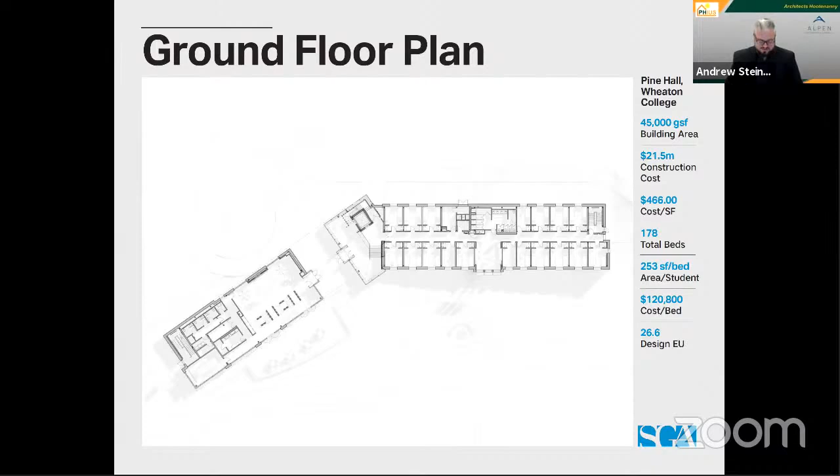The typical upper level demonstrates the efficiency and cost and performance through density. The ganged bathrooms also provided an ideal configuration for a drain water heat recovery system. And you see it's a mix of singles and doubles on a double loaded corridor. It also demonstrates how a lower carbon footprint per capita is achievable with a greater density of occupants.

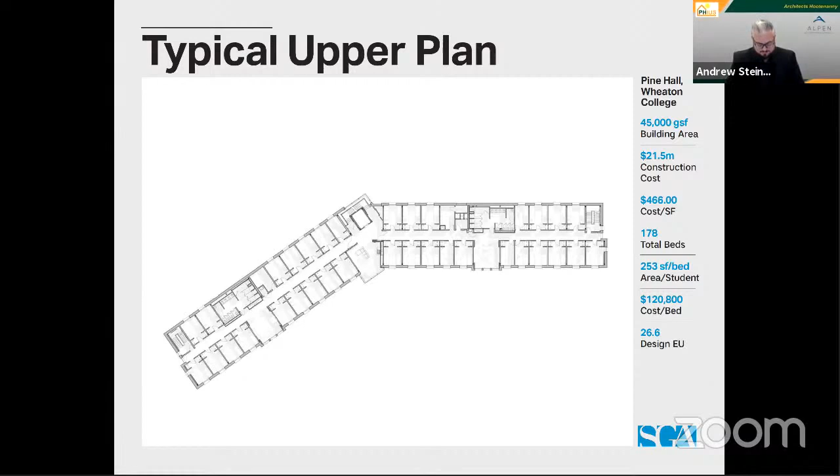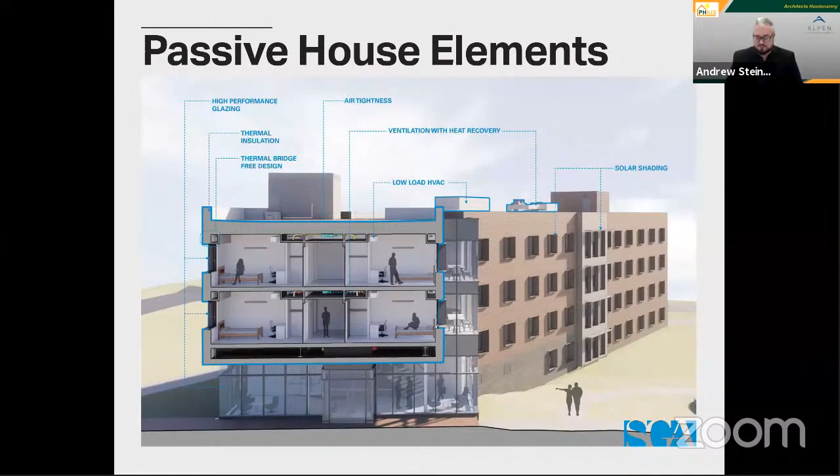So this was a steel and precast plank building, type 2 construction. It uses standard 6-inch cold-formed metal framing for the walls. And we maxed out the 5 inches of mineral wool outboard of the sheathing that we could use before getting to custom brick ties, and compensated for the rest of the remaining R value required in the cavity. Initially designed with cellulose, it ended up being closed cell spray foam per the builder's preference. Just belt and suspenders on the airtightness in their view.

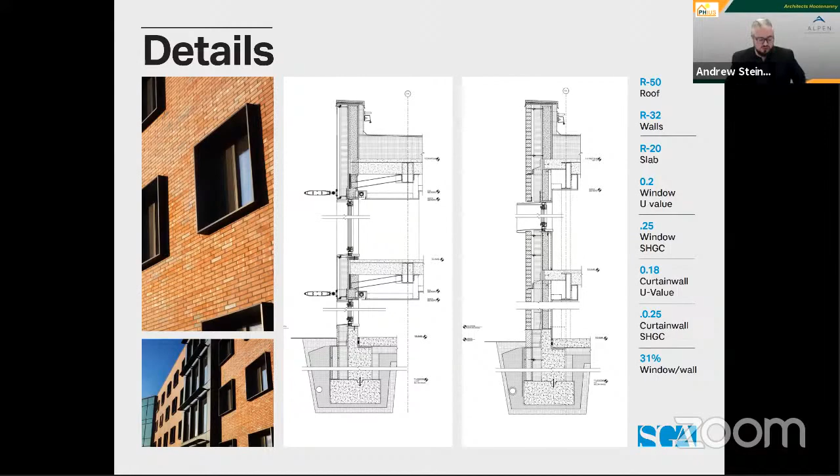And we tried to really incorporate the performance into the architecture here with the self-shading window surrounds, the depth of which was coordinated with the size of the window in an attempt to reduce the cooling demand.

For 4 decades now, Alpen High Performance Products has been true to our mission of manufacturing the world's highest performance, highest quality insulated glass, window, and door products available anywhere on the planet. We've done so and will continue to do so. As the company completes our exciting move this month to our new state-of-the-art manufacturing facility here in Colorado, we invite you to explore our products and learn more about our vision of the exciting future for high-performance fenestration products. Each of our customers over the last 40 years have supported our innovative culture in their own way. We honor each of them now with our current family of products that prove the best is not yet to come. The best is here right now. I'm Brad Begin, CEO of Alpen High Performance Products. We stand for quality, value, and innovation. We do not stand for the status quo, we stand for the future. Let's change the world together.